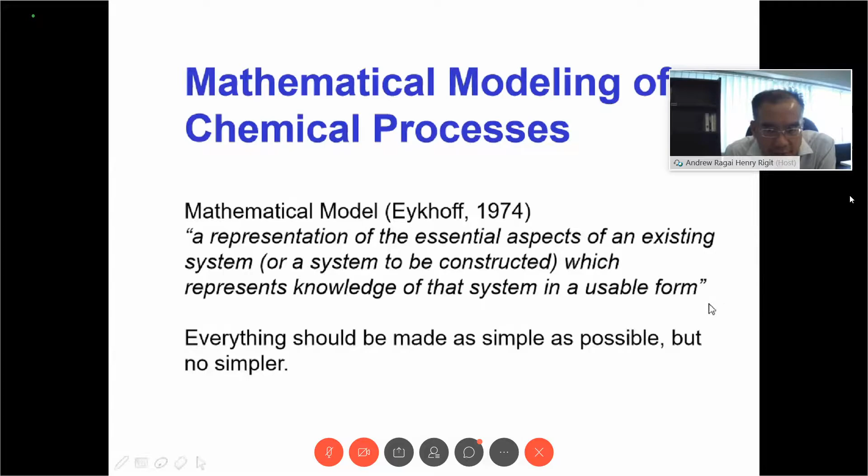So we come up with a mathematical model, as we can learn in this particular lecture. We did mention here the equations involve ODE and PDE, for example, and are very complex. Because we know it's quite complex, we apply the systematic approach in developing the mathematical models, as mentioned here. Step 1, 2, 3, starting from what is the objective, the schematic diagram of the process or flow chart, if you like, what are the assumptions, and what are the variables that you need to know.

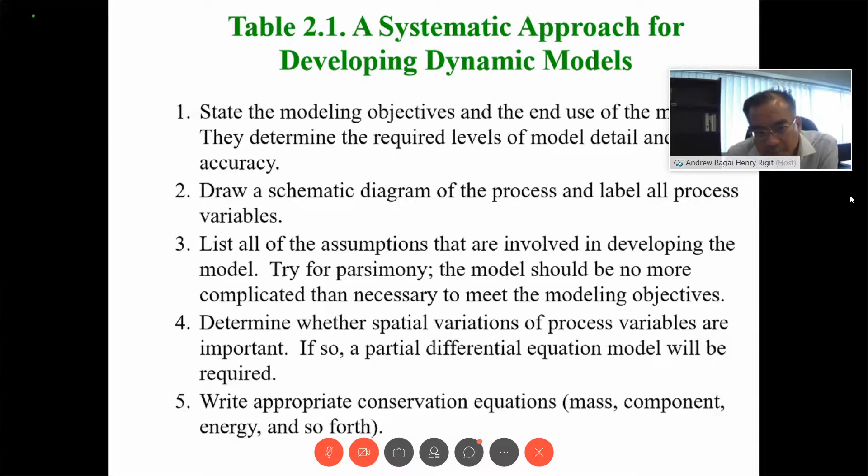You remember the equation y = mx + c, it's a linear equation, but y = mx² + x + c is no longer linear, etc. Then you even have y = mx³ and so forth, as well as an exponential graph in terms of log or ln. That is produced from the conservation equations, equilibrium, and how many degrees of freedom of analysis based on the variables we have.

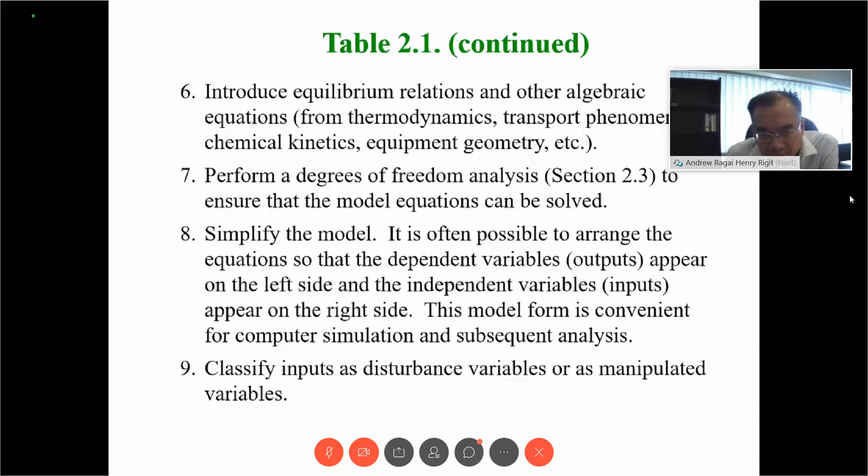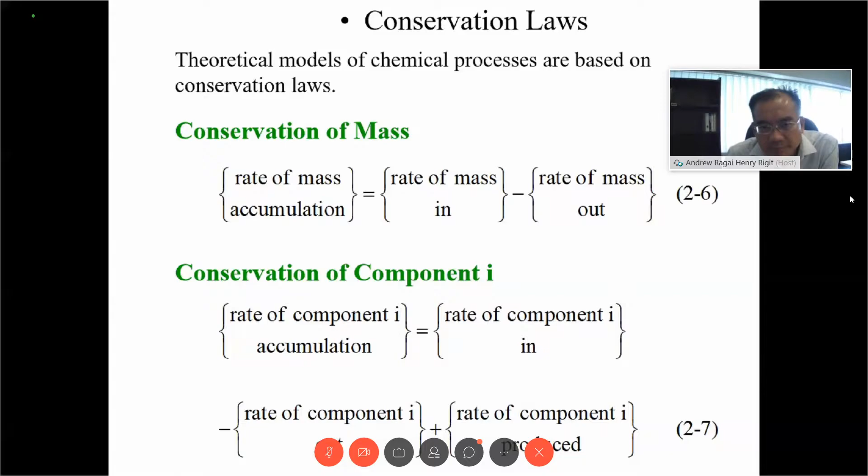And then your job is to simplify the model. You want to linearize it. If it's non-linear, it becomes linearized, for example. And we need to know what the disturbances are, etc. So we have looked into that, and also the modeling approaches as outlined here, and examples of conservation laws in mass, in energy, etc. We normally solve it with equations of momentum, for example in the directions x, y, z, or the unit vectors i, j, k. Conservation of energy examples you have learned in thermodynamics.

And further explanations on the uses of mathematical modeling: to improve the understanding of the process, for example, to optimize the process. When you do a differentiation dy/dx, you actually try to find the minimum or the maximum. That process of finding the minimum and maximum is considered the optimization process. Then you move to the design or control strategy for the process, and of course you need technicians or operators to look into the computer GUI, graphic user interface, so that they can monitor the temperature, the pressure, etc.

From the computer. So you need to train them. And also, when you do your simulations in CFD, for example, you know how to include your boundary conditions, etc. But at the same time, if you know how to explain the simulation result based on the theory, based on equations, it will be more convincing. So you can discuss the results as well as compare your results with others. So that is basically the engineering process: be able to produce the result, discuss the result, and compare your results with others.

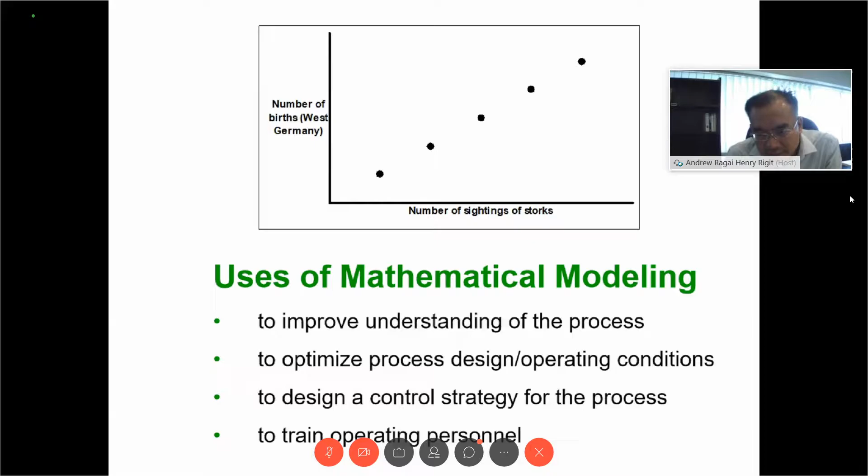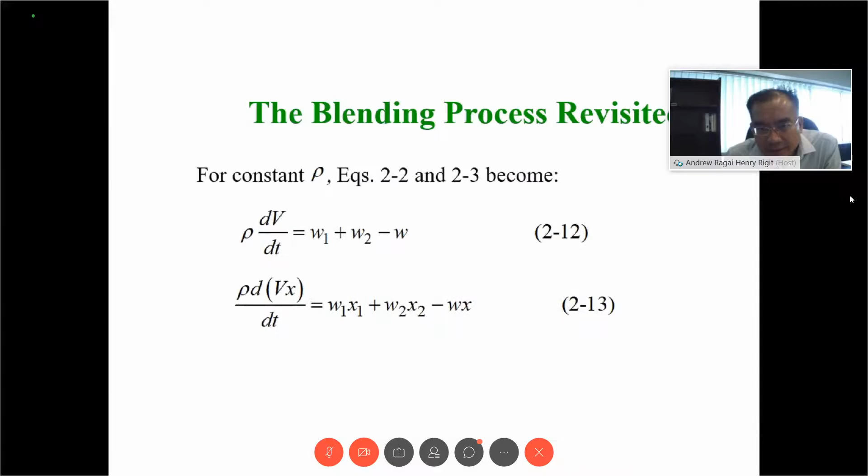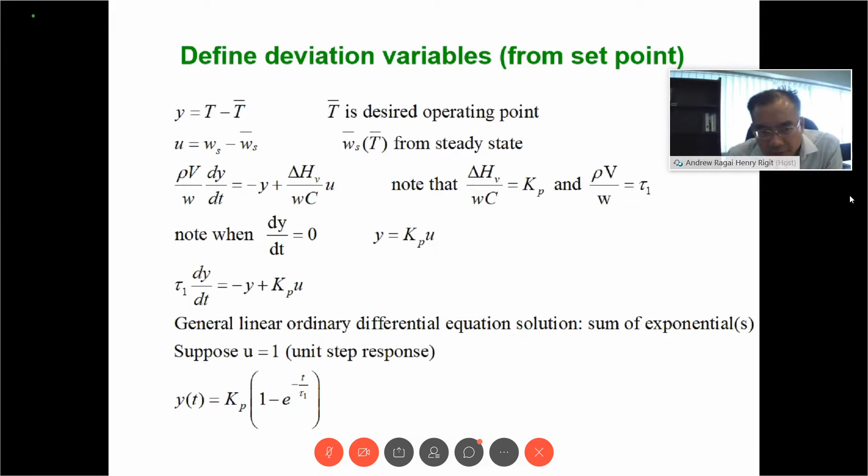So we looked into the example of the blending process to develop our simple mathematical model for this blending process. We've done that. So you have all these equations here, and many models we developed, model 1, model 2, model 3, based on the 4 assumptions that we had last time. Condition 1, condition 2, a combination of conditions 1 and 2, and finally the fourth one, we change the physical conditions of the process, we change the tank size, for example. So that's all together, with some examples of how to quantify it, etc.

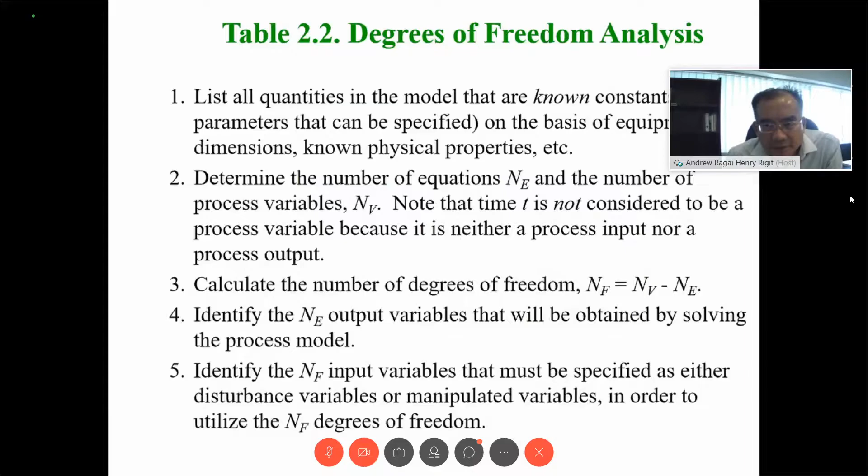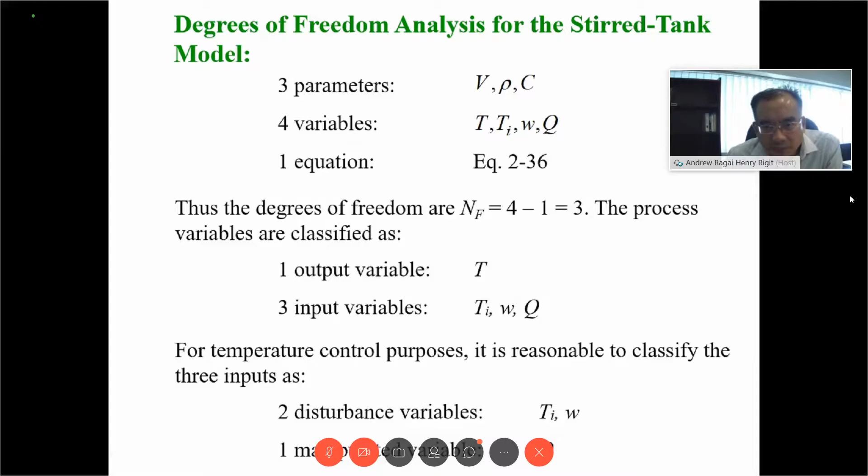And then you also learned about degree of freedom analysis. We have 4 variables, 3 parameters, and 1 equation. That means the degree of freedom is 3. And we skip this one, biological reactions, because it's more suitable for chemical engineering. So that's what we discussed last Tuesday, in the last lecture on mathematical modeling. We chose chemical processes for our mathematical modeling, in this case stirring liquid inside a tank, with the addition of heat, temperature variables.

Any questions before we move to our proper lecture, further on the mathematical equations? Here we look into the Laplace transform. Any questions?

Question. Did I talk too fast, or is it okay for you all? Yeah, it's okay. Just nice. Okay. So you get the point that I try to give to you, and how that relates to the CEO talk last Tuesday.

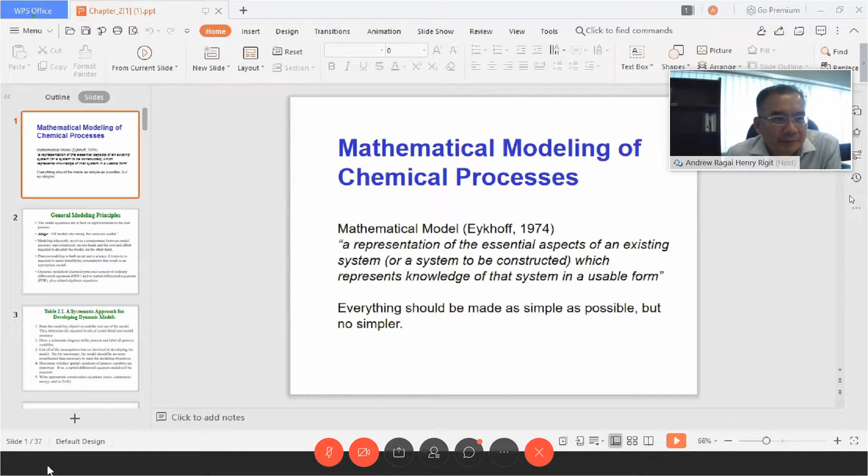Yeah. Any idea? Okay. Nothing that you want to ask before we move to the next one? You see the mathematical modeling, right? The slide on mathematical modeling. Yes, you can see it. Okay. Now I move back to here.

So we move to Laplace transform. So I will cover this in about 40 minutes or 45 minutes. Okay, you can see that Laplace transform, typically Laplace transform. Yes, Paul, you can see the slide. Yes, I see it. Yes, Laplace transform.

Okay, we have discussed mathematical modeling. So from the process we come up with the mathematical equation of the process, which involves maybe the first law of thermodynamics, for example, or energy equations which involve heat or temperature. Or with regards to flow, we look into the continuity equations, conservation of mass. And in other processes, in fluid mechanics, you also learn probably about momentum, force, when you're talking about Newton's first law, second law, third law.

So basically, what you have learned in your first and second year is to develop the equations for physical engineering processes, by understanding the fundamental knowledge to develop equations based on Newton's law, energy equations, etc. So now we have these equations, and we want to apply them into our control systems. As it is, we cannot apply these equations directly to our control systems. There must be a way to transform these mathematical equations into other mathematical equations that can be recognized by the computer, or in other words, the computer language.

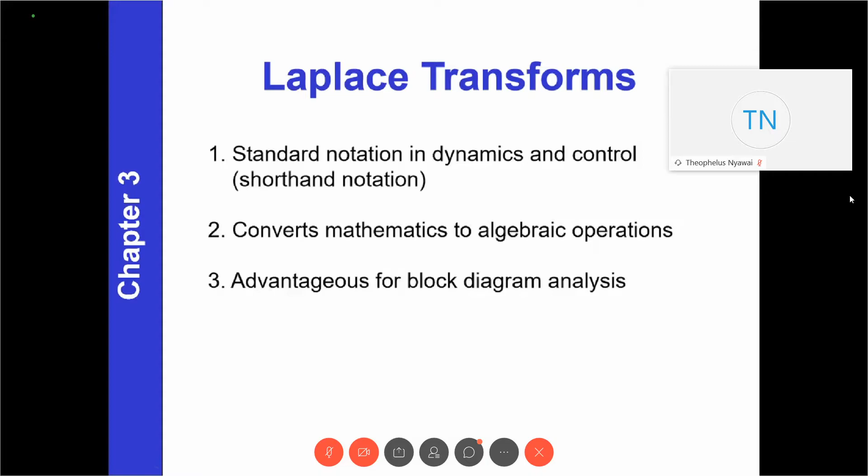Any questions on Laplace transform? No question. Okay, good. Everyone clear on what I tried to say or share with you? Okay, if none, then we look into what is actually Laplace transform.

Remember your mathematics 2 or maybe mathematics 3, when you learn about Laplace transform, you come up with a letter L, which is representing Laplace transformation. So L in the bracket of function f in terms of t, and that is normally followed with integration or differentiation. For example, the Laplace transformation of function f(t) equals the integration from limit 0 to infinity of f(t) times e power -st, integrated with respect to time dt. Then we have these equations as given there.

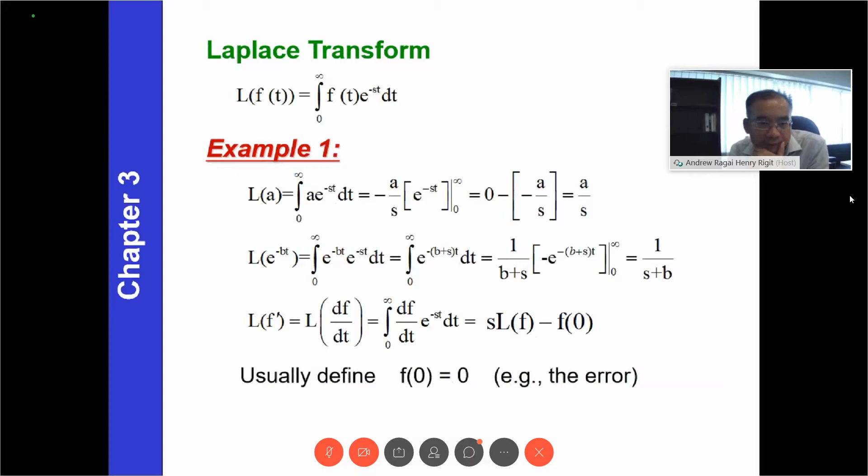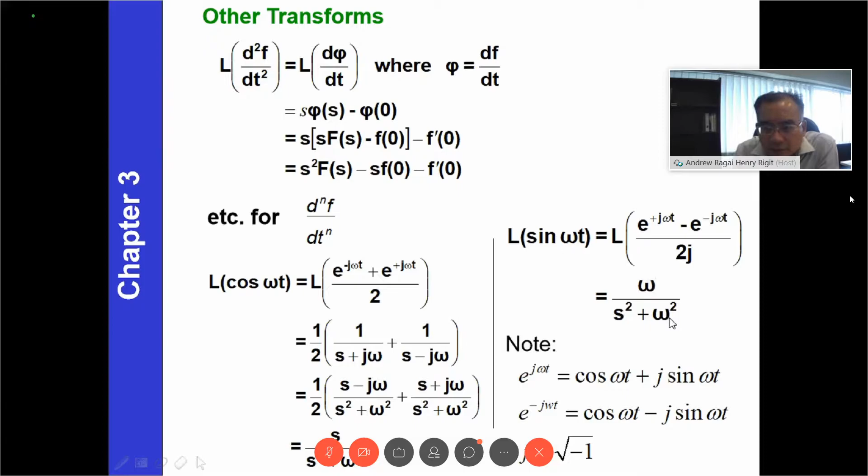And we also have Laplace transforms for cos and sine. For example, the Laplace transform for cos ωt is in the form of s over s squared plus ω squared. And for sine, L of sin ωt is given as ω over s squared plus ω squared, and many others.

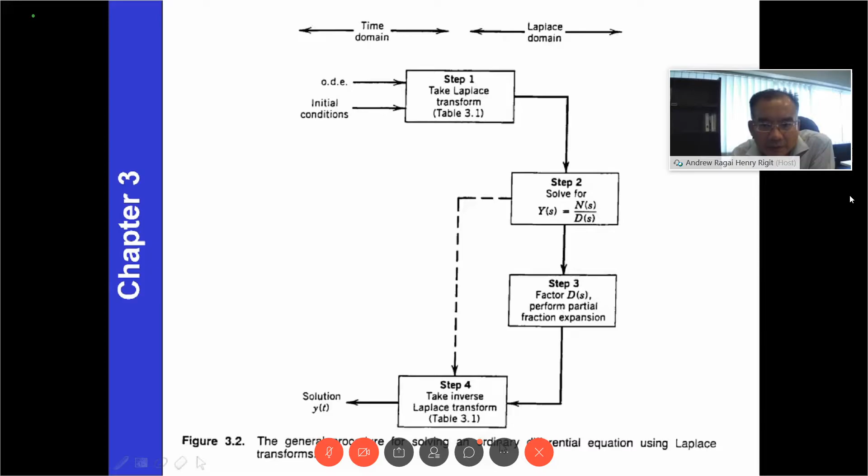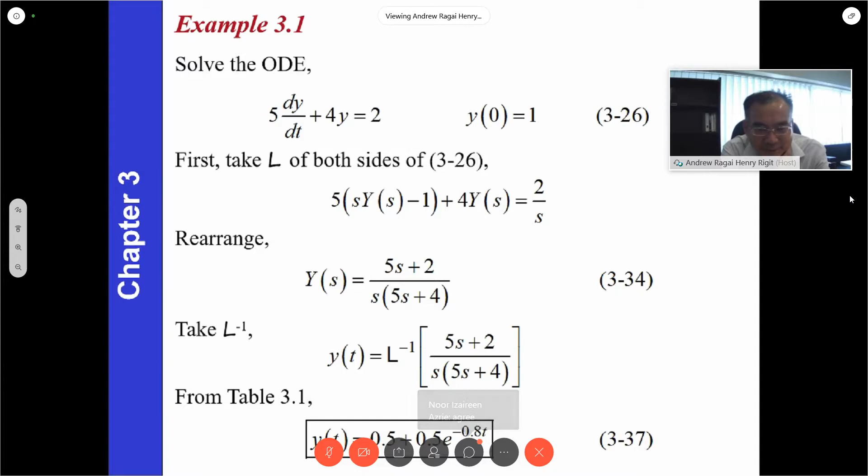So personally, when I was being paid 50,000 for 8 months work, and those working in the control room in the aircon were being paid 250,000 for 3 weeks, initially I complained, but when I think about it, I should not complain, but probably I just need to admire them. Because they really, how do you call it, crush your brain to really understand these equations. So you cannot rely on them.

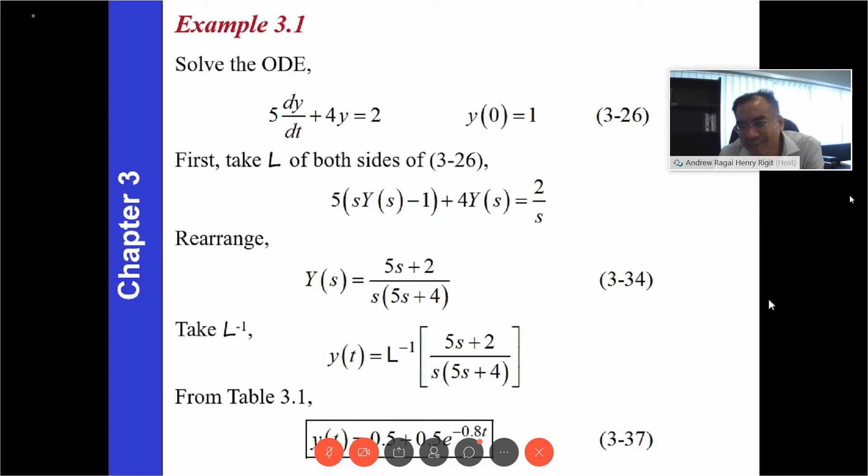But in the future, as the CEO of Petronas said, when artificial intelligence is applied more widely, graduates need to learn at least 1 or 2 computer languages, I think it becomes a norm, and probably the difference in pay between a programmer and an engineer gets less, because now the programmer cannot say that only they can do that, but the engineer also can do the job as well. We can demand a bit of the pay as well.

So another example, this is a third order differential equation, d³y/dt³ plus 6 d²y/dt² plus 11 dy/dt plus 6y equal to 4. For this one here, you apply the Laplace transform, LT, and then you use partial fraction decomposition and take the inverse Laplace transform. And this is for the response to a unit step at t bigger than 0. So this equation here, the Laplace transform, noting the zero initial conditions, you will have it in the form of this one here.

d³y/dt³ becomes s³Y(s). So 6 d²y/dt² becomes 6s²Y(s), and 11 dy/dt simply becomes 11s times Y(s). So Y(s) is always there. Y(s) stands for the output. We look into the output when you learn about transfer functions. But we do that Tuesday next week, not today. Today we just focus on Laplace. Next week we look into transfer functions, in more detail what it means with this Y(s). Plus 6Y(s) equal to 4, the constant, the Laplace transform becomes 4 over s. Here, 4 over s.

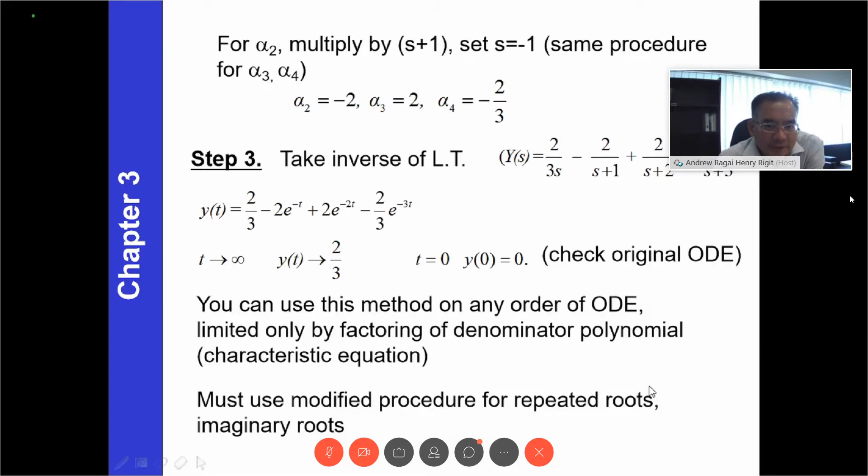So in short, we can say that Laplace transforms can be used in process control for: one, solutions of differential equations, and those differential equations need to be linear differential equations; two, analysis of linear control systems, there is a frequency response. So the question is, if it's non-linear, how to analyze? Actually you also learn this in maths — for non-linear, you can linearize it. That's why for non-linear we linearize it first, and then you can solve it using Laplace transform. And third, predictions of transient response for different inputs.

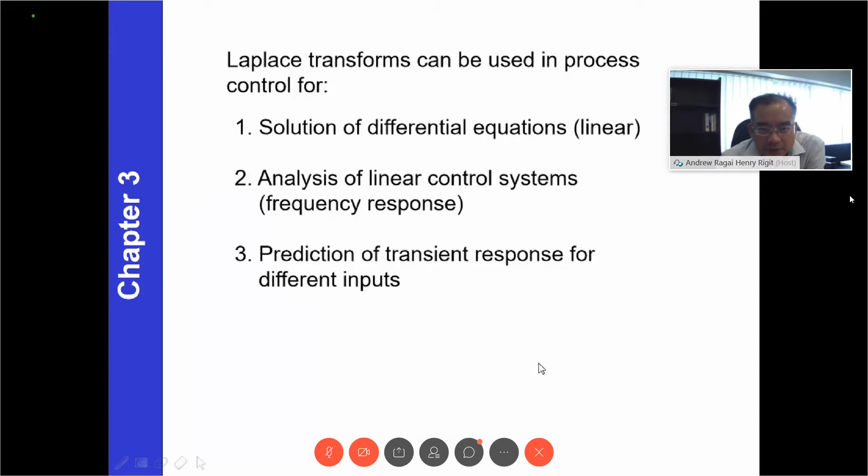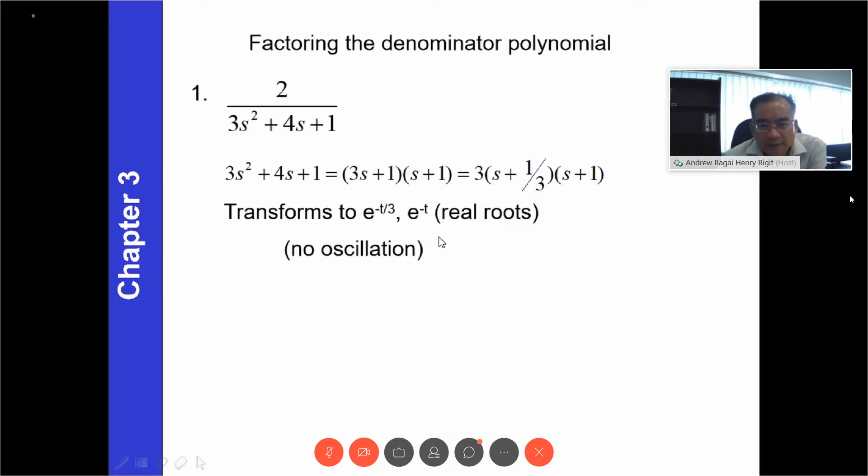In this case, since they are all real, there's no oscillation. But in another equation, 2 plus s over s squared plus s plus 1, here we have the imaginary root, given the symbol j.

So here we can transform, for example, e to the power of minus 0.5t times sine of square root 3 over 2 times t, giving oscillation. If you look at Table 3.1, row 17.

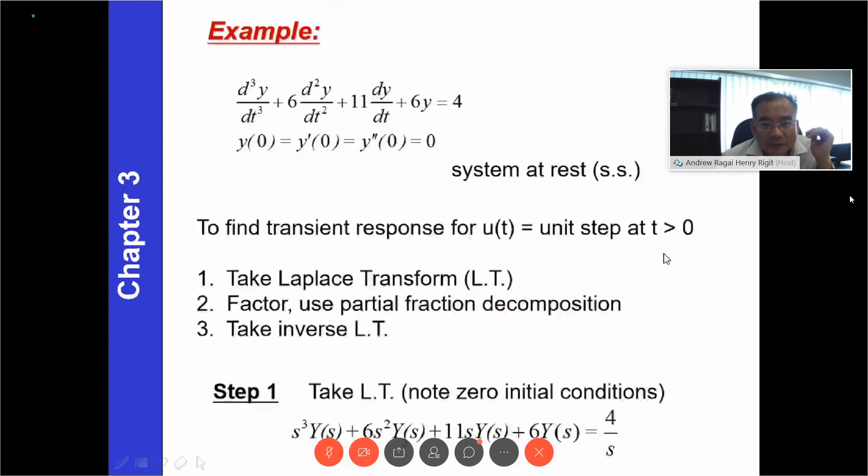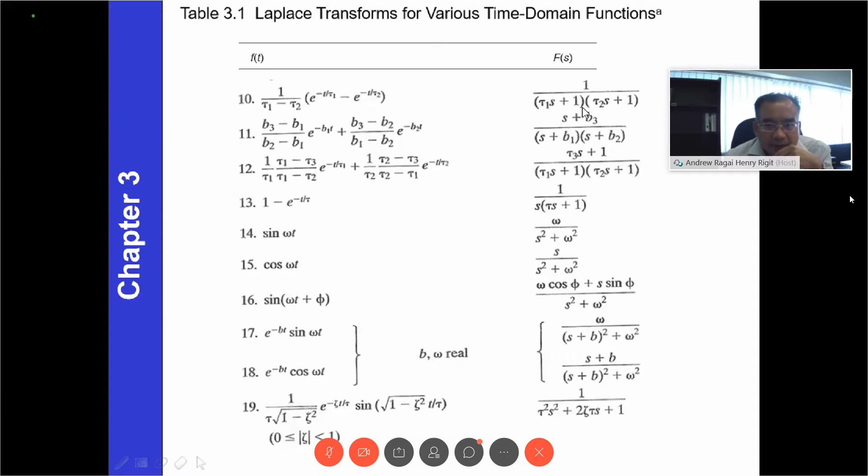Go to Table 3.1 here, Laplace transforms for various time domain functions. Row 17, this one here: for b and omega real, you have the Laplace transform F(s) given by this expression.

We have this solution: from e to the minus bt sine omega t, the Laplace becomes omega over (s plus b) squared plus omega squared. So that becomes 2 over s squared plus s plus 1, equal to 2 over (s plus 0.5) squared plus (square root 3 over 2) squared. If you simplify further, you obtain this result.

For e to the minus bt cosine omega t, the Laplace becomes s over (s plus b) squared plus omega squared.

There's also the case for rectangular pulse input, the pulse element. If h equals 1, the pulse input gives this equation here, based on L'Hôpital's theorem, which I think you've learned in Maths 3.

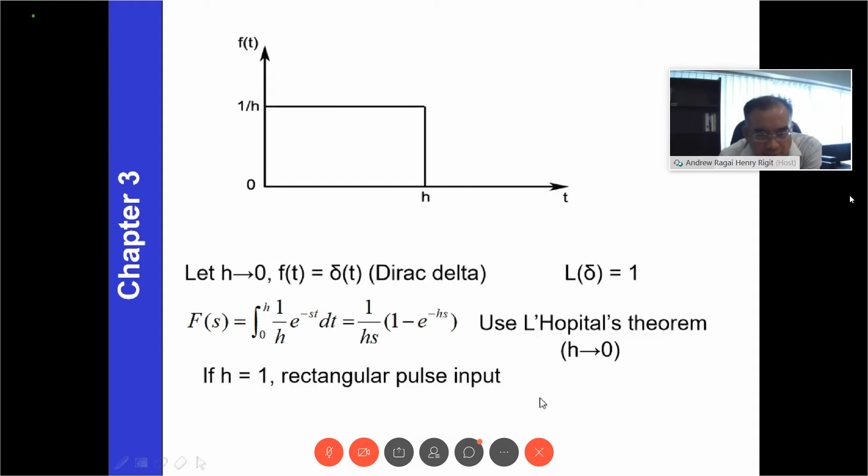I cannot really remember, but I think you can find it in Maths 3. The difference of two step inputs, S(t) minus S(t minus 1), where S(t minus 1) is the step starting at t equal to h equal to 1, by Laplace transform F(s) equals 1 over s minus e to the minus s over s, which can be generalized to steps of different magnitudes, a1 and a2.

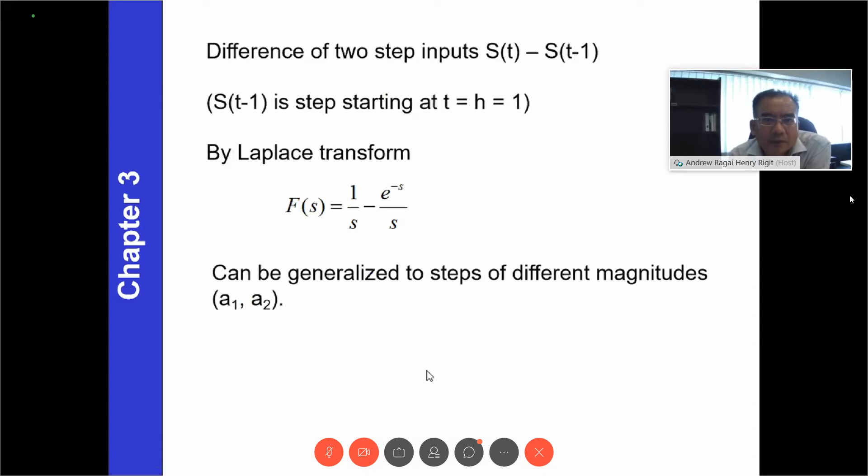One other useful feature of the Laplace transform is that one can analyze the denominator of the transform to determine its dynamic behavior. For example, for Y(s) equal to 1 over s squared plus 3s plus 2, the denominator can be factored into (s plus 2)(s plus 1) using the partial fraction technique.

Y(s) equals alpha1 over (s plus 2) plus alpha2 over (s plus 1). The step response of the process will have exponential terms e to the minus 2t and e to the minus t. Here, s plus 2 becomes e to the minus 2t, and s plus 1 becomes e to the minus t, which indicates y(t) approaches 0.

Also, y equals 1 over s squared minus s minus 2, which is s squared minus s minus 2, equal to (s plus 1)(s minus 2). Then we know the system is unstable and has a transient response involving e to the power of 2t and e to the minus t. Then e to the 2t is unbounded for large time. We shall use this concept later in the analysis of feedback system stability.

And there are many other applications as well, for example, the final value theorem for t approaching infinity.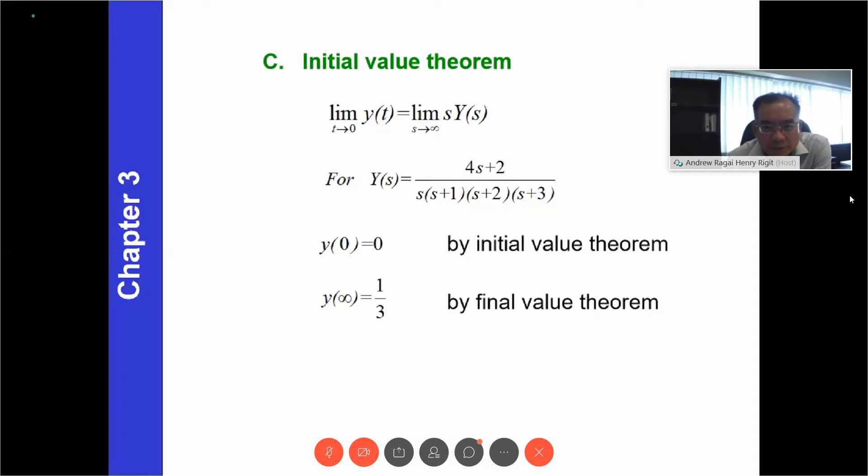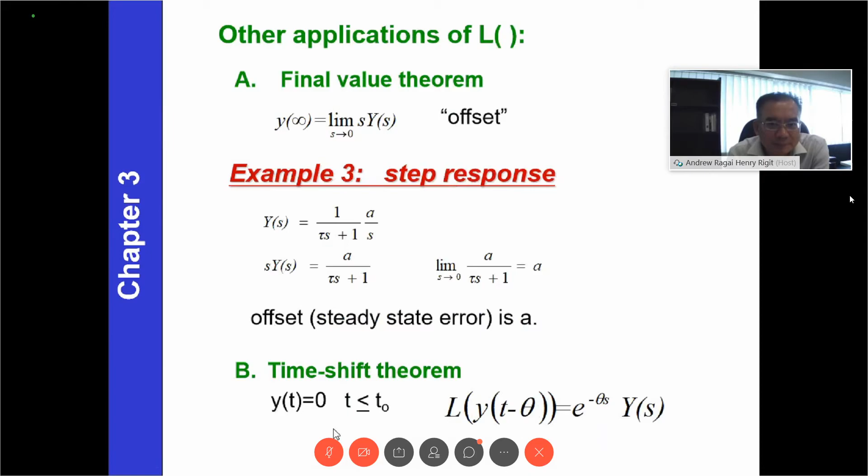So that's all about Laplace transform. Next we are going to look into this for not just one equation, but many equations combined together, which gives us what's called the transfer function in the next chapter. So I'll stop here. I don't want to jump straight to the next lecture, otherwise we rush.

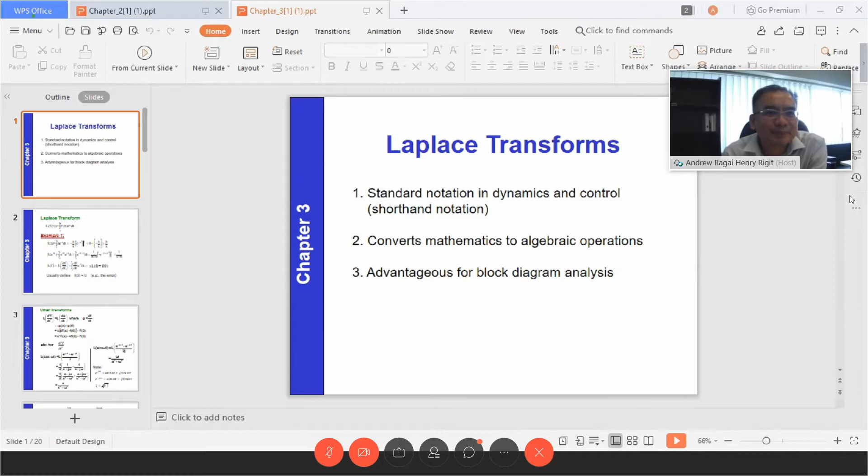Next week on Tuesday, after Laplace transform, we look into the transfer function. And then after that, I will finalize your assignment that will replace your final exam. Normally in previous years, the final exam questions are more concept-based, but now you have more time to do the final exam because you're doing an assignment.

Probably you can do a bit more calculation on this concept. So I have in mind to include what we have learned in developing a theoretical model for a process, understanding the control terminology, and finally ending up with the transfer functions. After you develop the numerical model, apply the Laplace transform, and come up with a transfer function for that process, you also need to come up with the block diagram of the process where you want to obtain the transfer functions.